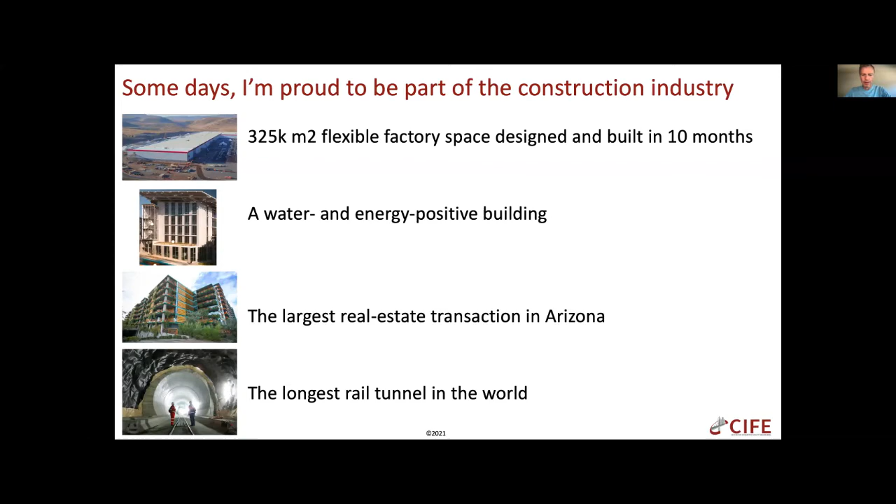And other days I'm a little bit ashamed, or at least not so proud, because I see work that is not safe, poor quality. I see lots of waste. I see lots of rework. I see unproductive work, problems like that.

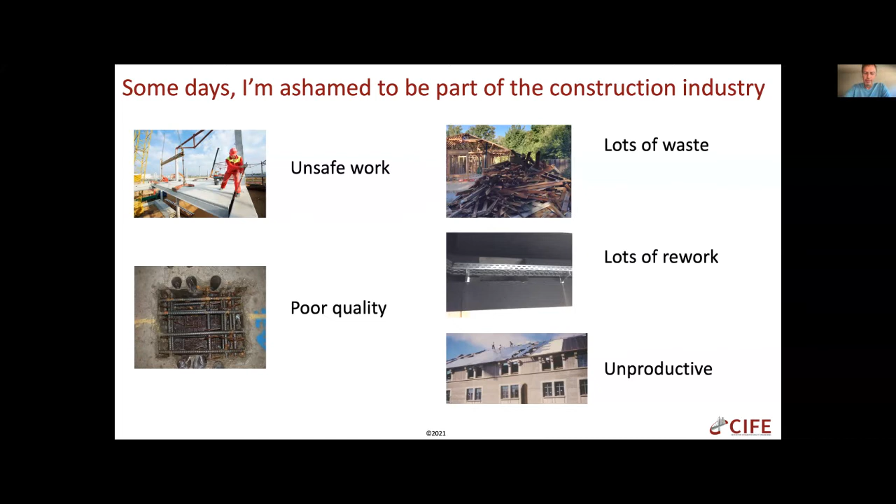But of course, you can say, on our projects, we have many challenges, so things don't always go well. We have changing market conditions, economics. We have resources that are fluctuating, from somebody getting sick to all kinds of reasons why resources are fluctuating. Unforeseen conditions in the ground where we build. The environment can be a challenge. That could be wind or weather or something else.

And approval processes can be uncertain in how long they take. Regulations differ from place to place, and many more. I know you know these challenges very well. So of course it can be difficult to create a great project every single time, given these many challenges.

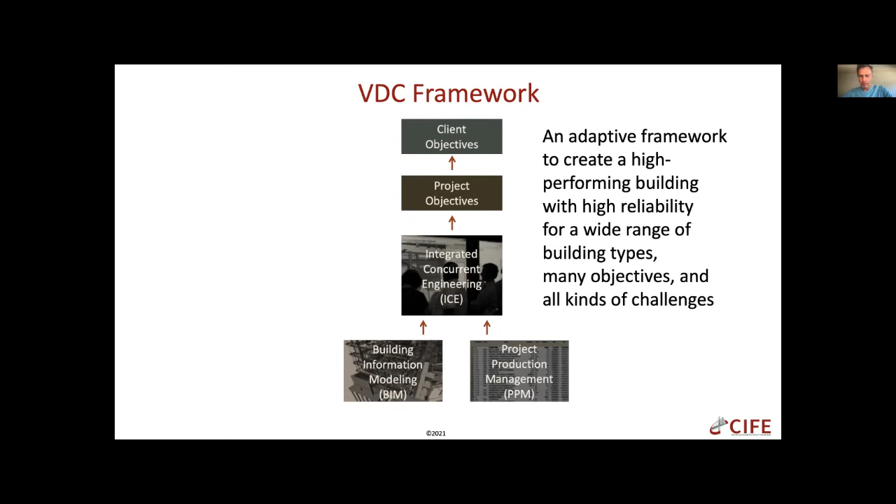So, first of all, of course, the framework has to support us, the different disciplines, the different people doing a project. And I know it's easy to say, bring the right people together at the right time in the right way, but I think you will see, especially in the example, what this means specifically.

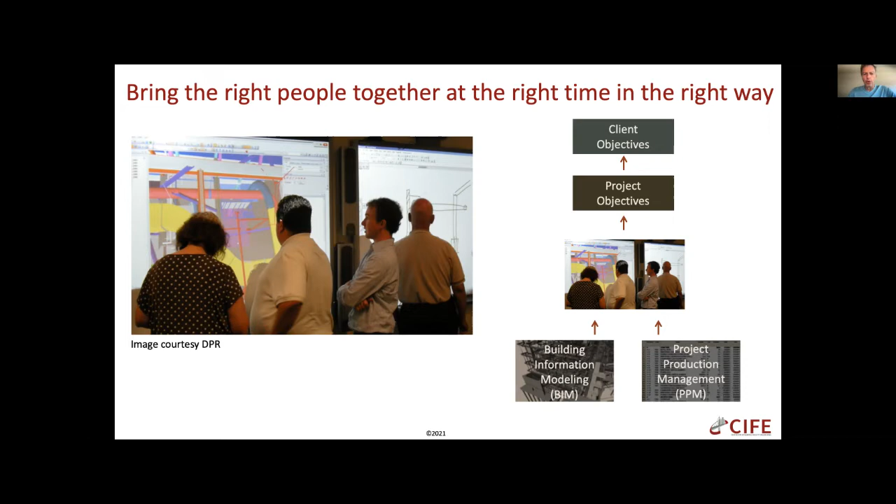Right, this is where this fits into the VDC framework in the integrated concurrent engineering spot. Of course, these people cannot do much very well without good tools and information.

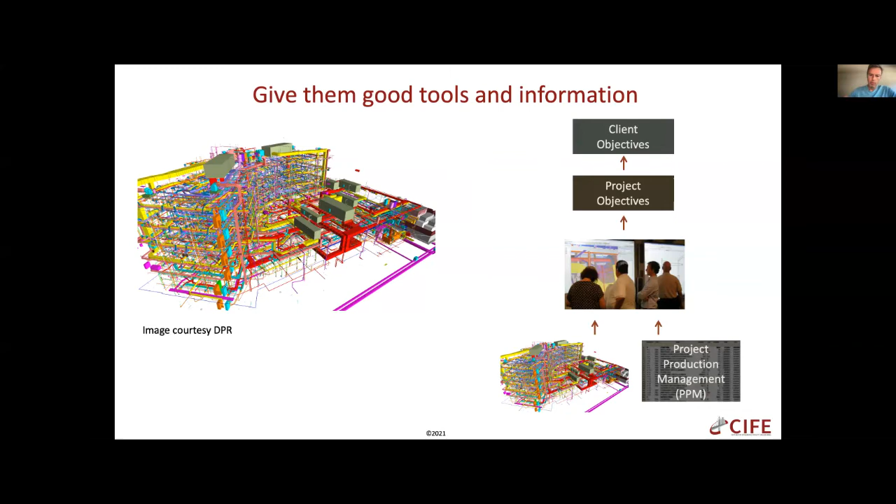And we also have to create, of course, productive work processes.

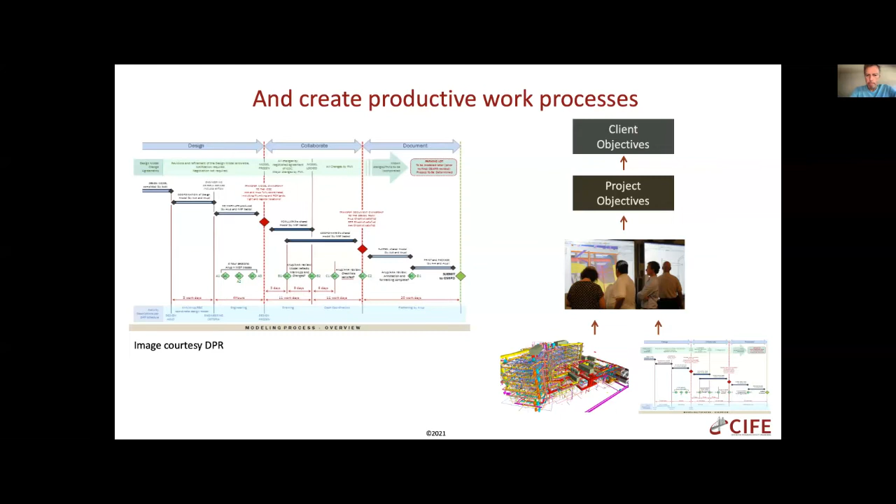And establish and track project objectives.

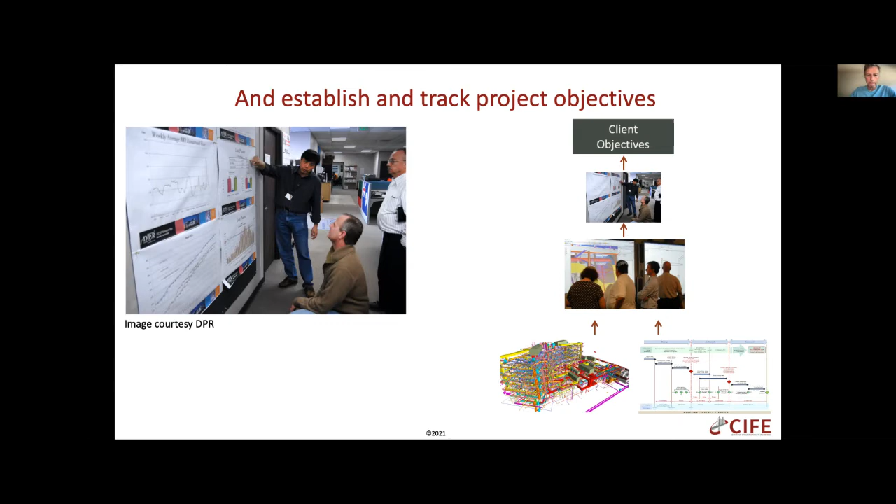And of course, also client objectives in terms of the purpose of the building, what the client wants to do with the building, or the infrastructure that we are realizing.

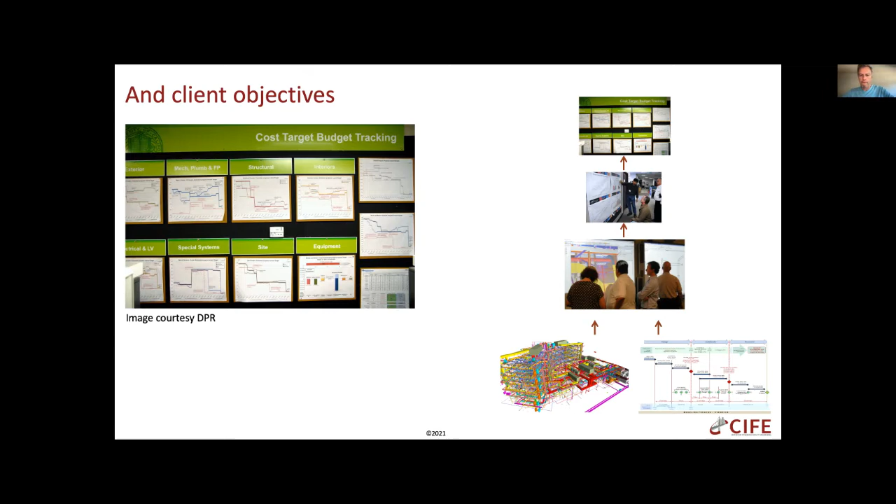So this is VDC, right? Bringing the right team together with the right expertise that is necessary to achieve the project and client objectives, and giving the team good information, but also having the team create good information because they're using a good process. And I will show how all of these elements actually support each other.

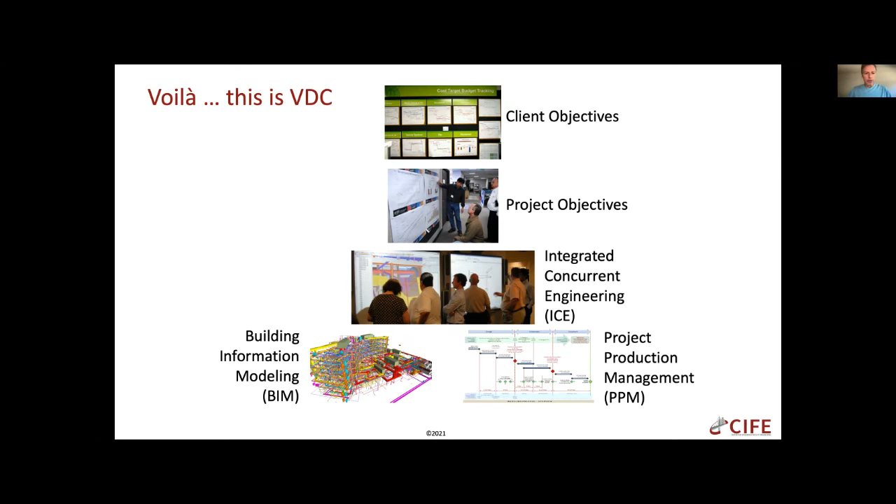So before I illustrate those VDC capabilities, just a quick reminder, of course, that our projects consist of the design and construction phase, of course, also use and operation phase. But here I want to focus on the design and construction phase because they create the buildings that we use.

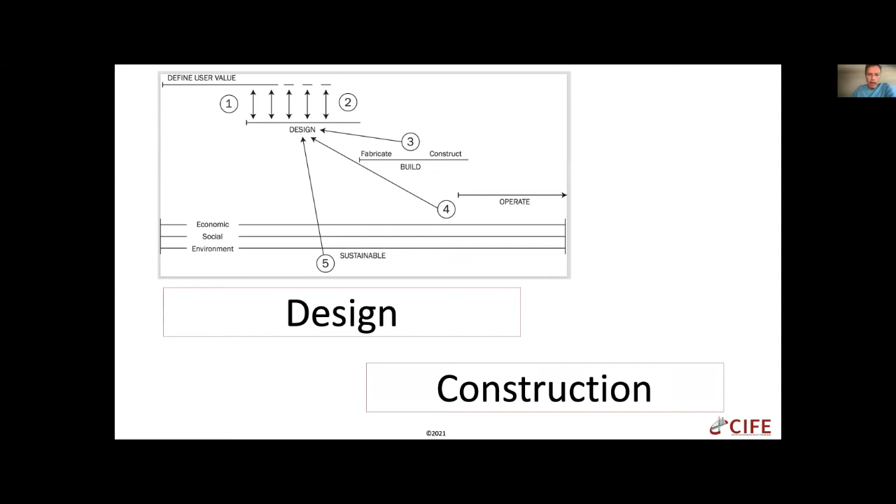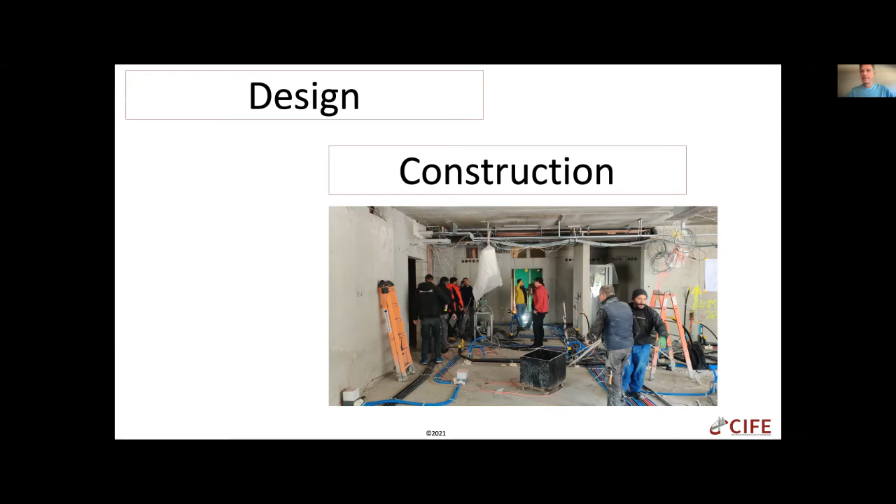In summary, a good construction manager organizes work into logical sequences, is driven by schedule, has clear and well-established performance criteria on safety, quality, schedule, budget, works towards clear completion goals, moves on when a task is done, uses management-related tools for planning.

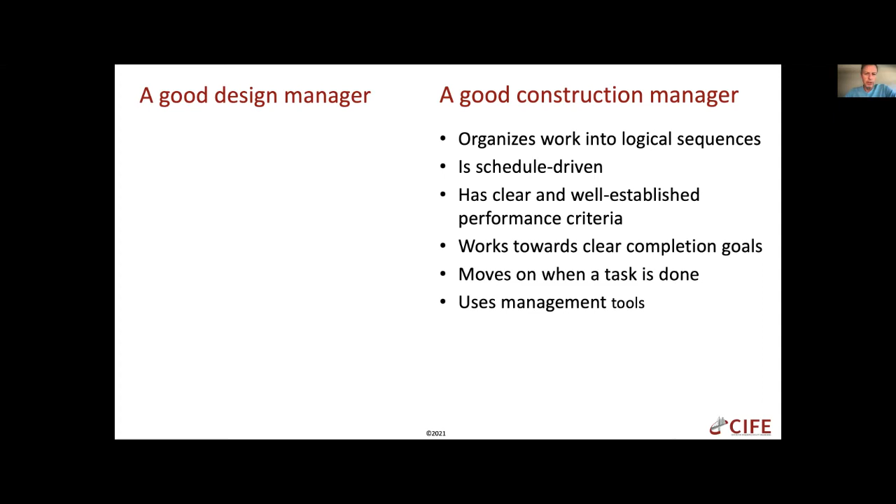It's interesting to contrast that with what a good design manager needs to do. A good design manager needs to integrate the disciplines. A construction manager needs to break them apart into chunks. A design manager must be solution driven. If it takes another week to get a better solution, it's probably worth it. Has to manage trade-offs between many disciplines and criteria. Deals with open-ended work. When is design finished? Maybe if we look at one more design option, we find something better. You don't know until you've tried. Often revisits prior works and how we could improve that, and uses quite different tools, like 3D modeling and so on.

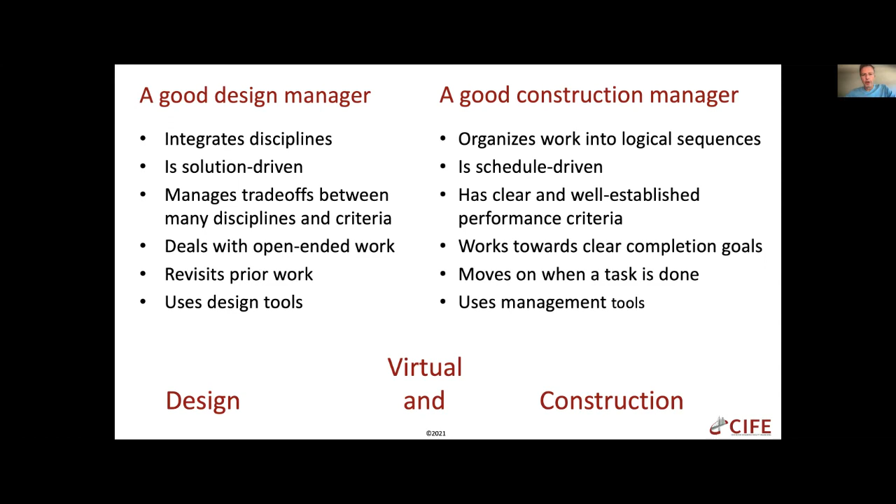Okay, so hopefully with this background now, you can then connect the VDC capabilities that I will introduce in the context of this very challenging hospital project in San Francisco that was completed a few years ago.

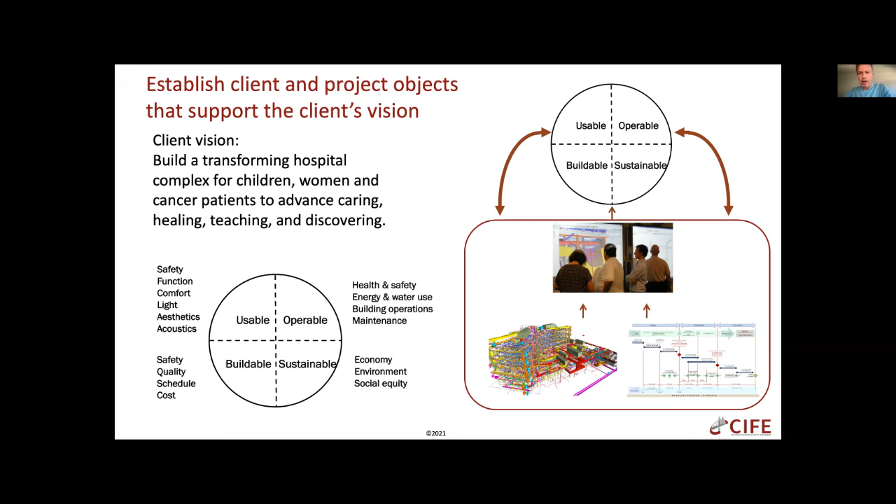So for that, they realized they had to create an integration plan, how to bring the organization, the measurements, metrics, the processes, the tools, the collaboration together.

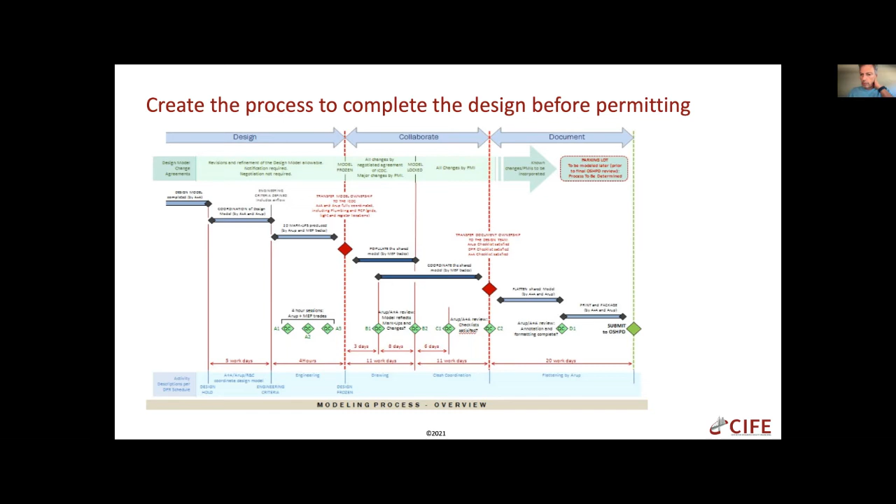So this process was shaped by the objectives that had to be achieved. We had to save 50 million without sacrificing the scope. But also, of course, it was driven by the people working on the project, the different disciplines, and it informed what needed to be done when. It was focusing on producing the information that is needed for the decisions, and also for permitting and for construction later.

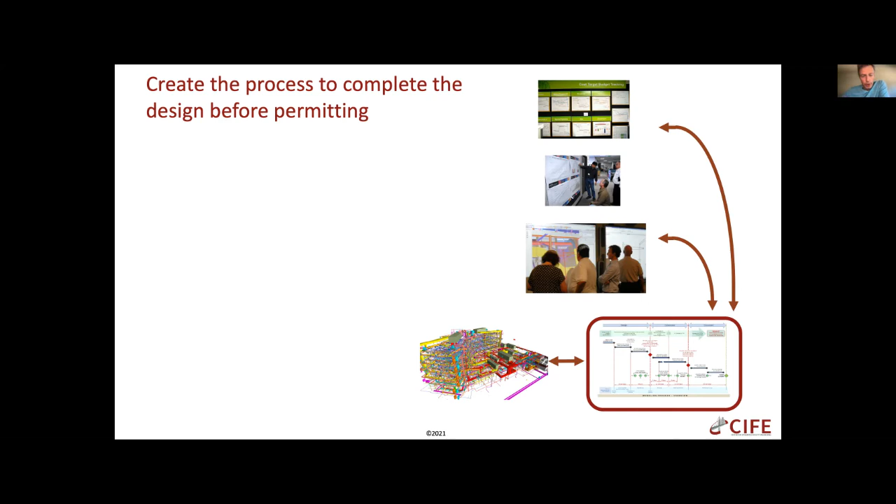Supporting that is, of course, how the people work together. So the team also designed the collaboration space and the work routines. It's probably a little bit too small to see here, but there are actually several of these offices on the project site, and in each of these offices they had multidisciplinary teams sitting side by side: the architect sitting next to a subcontractor, the general contractor sitting next to an engineer, and so on.

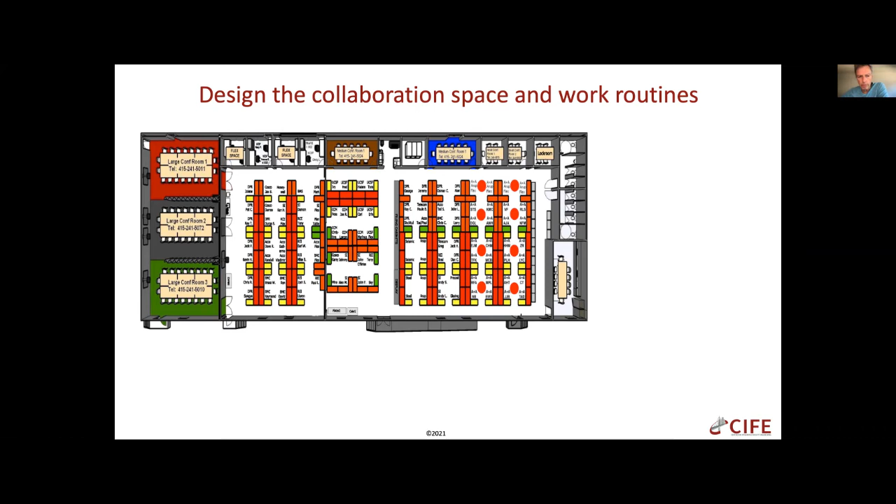Part of that was also to define the work routines. For example, one of the routines they had is every Monday, Wednesday, and Thursday from 8 o'clock in the morning to 1 o'clock in the afternoon is collaboration time. So expect to be interrupted, to answer questions quickly, and so on.

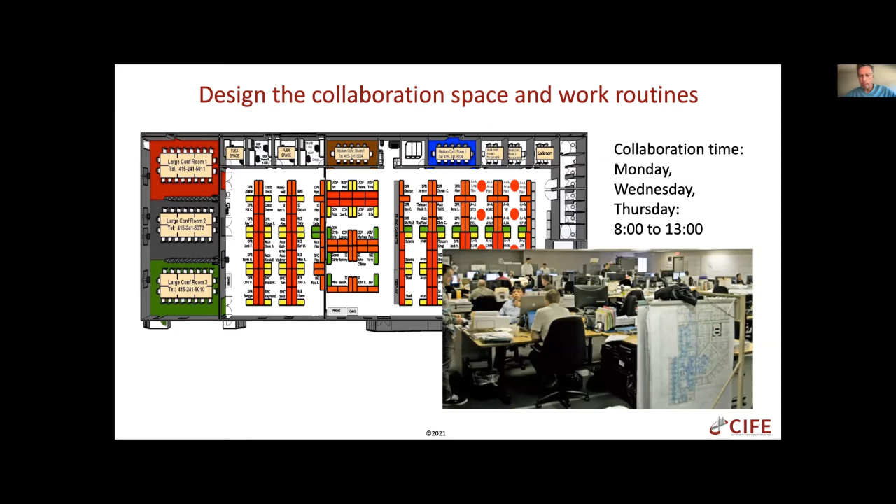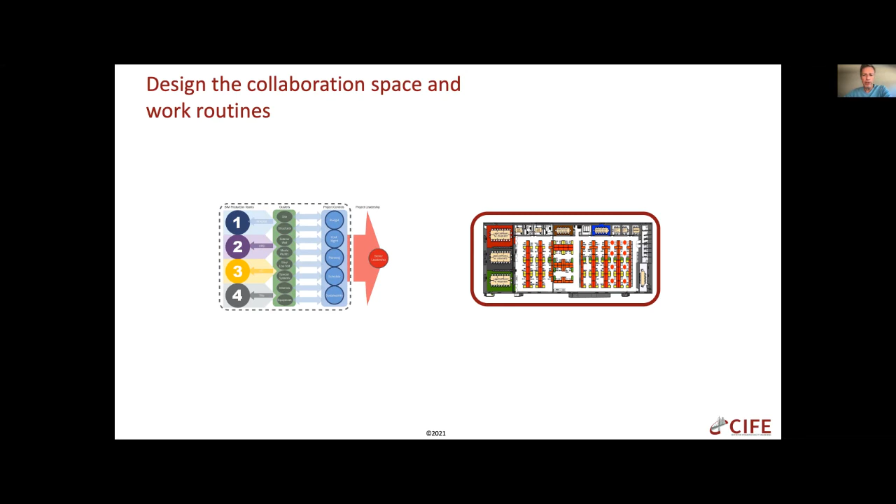So if we put it in the VDC framework, you see how the organization design and the design of the workspace and collaboration supported each other, and was also done in the context of the process that was followed, the tools available, and the objectives that had to be met.

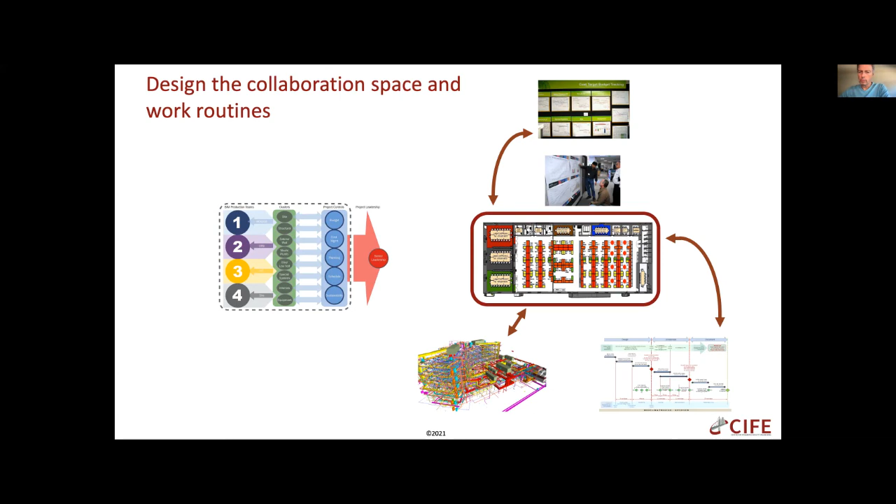The other capability that was really key was the alignment of the objectives with the organization. So the organization was broken up into clusters that focused on a particularly important part of the project, like structure, exterior, interior, mechanical, plumbing, and so on. And each of them had a mutually established target for savings, so that together they would save the 50 million.

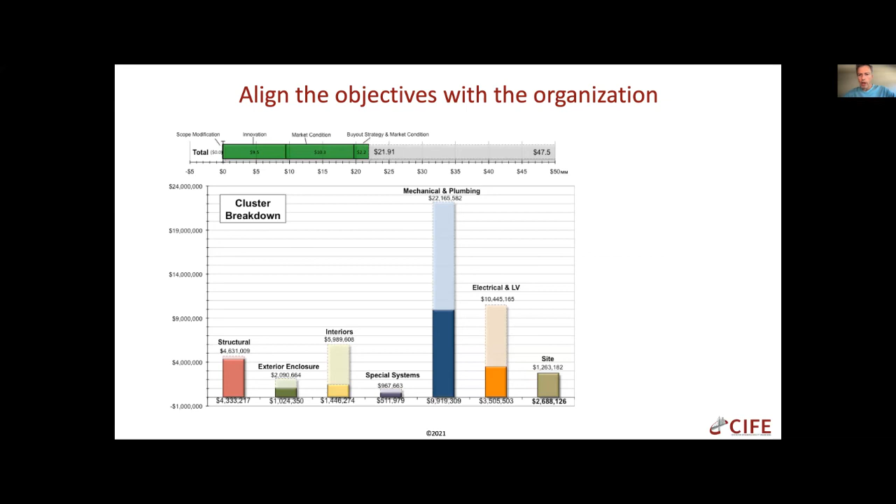And you could see them very frequently discussing, tracking these objectives and discussing them in a collaborative way.

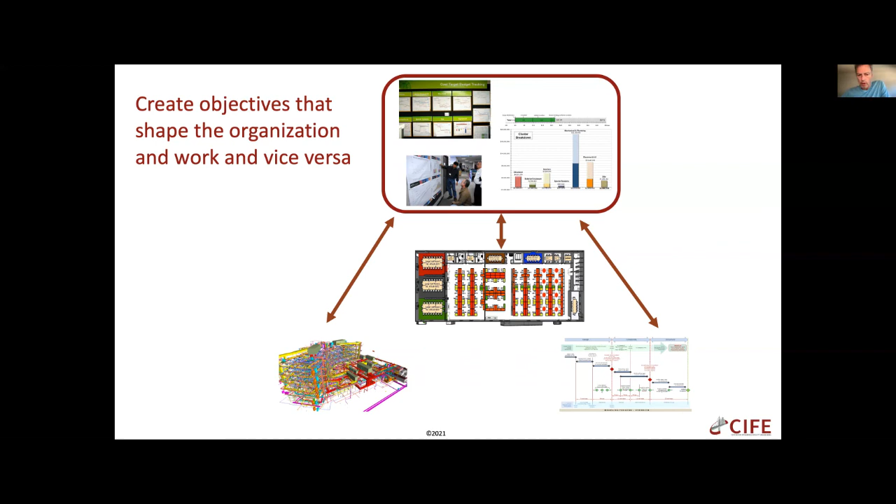And the last main thing the project team did is they were very thoughtful about the information that would be needed at each step. You don't want to have too much information and not too little. And so that was, of course, another important part of the collaboration between the different disciplines and setting up the process.

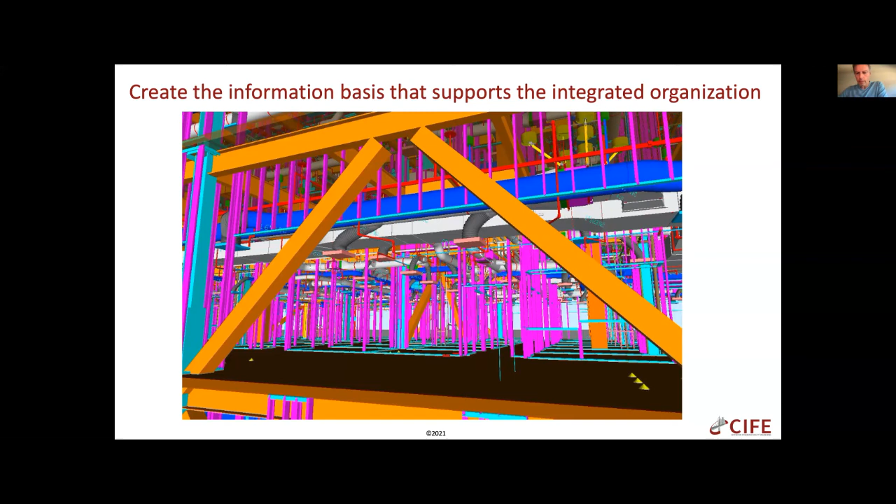So, as you again can imagine, the objectives of saving the $50 million informed the kind of things that the project team had to be certain about, so that they could confirm that the savings was really possible. And that was, of course, connected with the ability to produce the information and then use the information in the collaboration space and in the process.

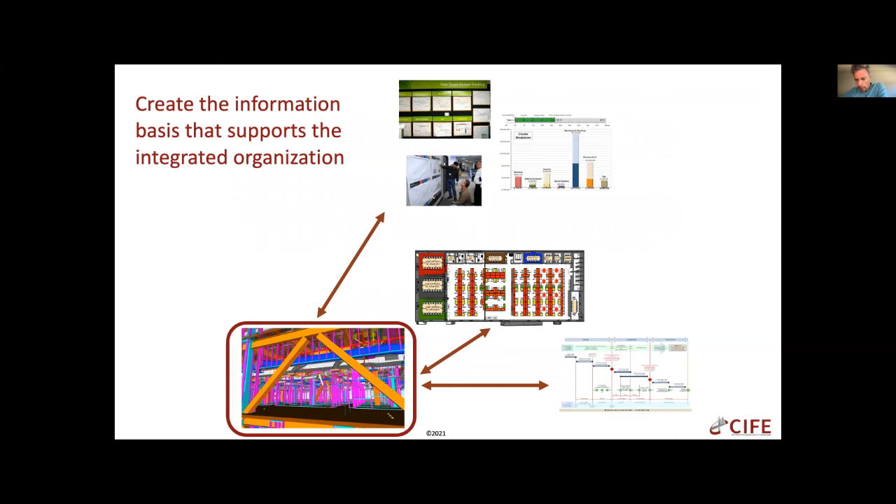So what I hope you've seen through this example is how a project team used the VDC framework as an adaptive framework for creating a high-performing building with high reliability. Because they faced a number of challenges they didn't all anticipate, but they were able to build this hospital on schedule with the whole scope, with the reduced budget, and without any accident, without any loss, without any injuries.